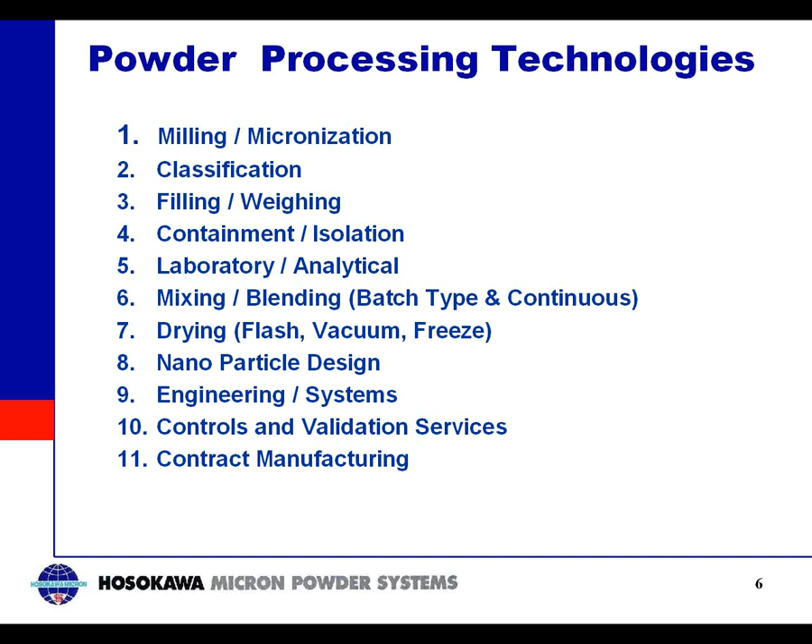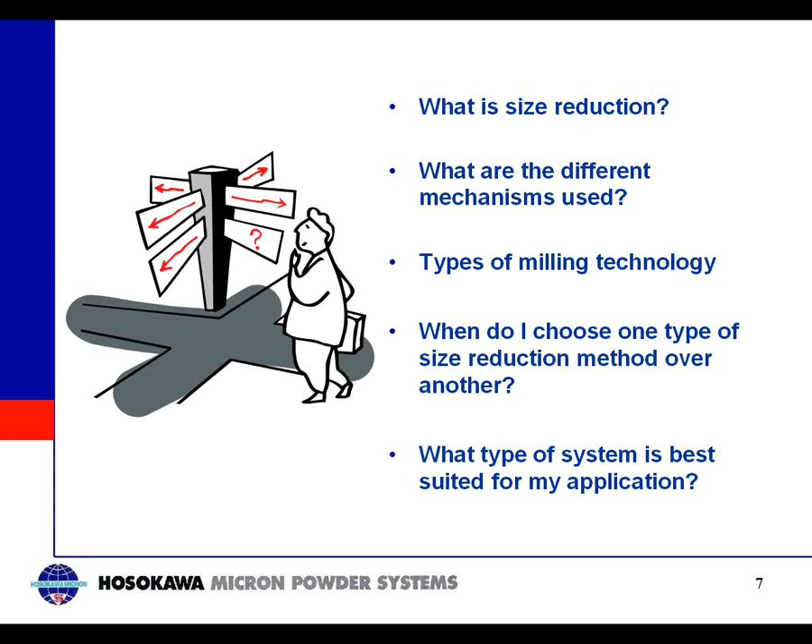Good afternoon. My name is Rob Voorhees, and I will be the presenter for today's webinar. Welcome to Part 2 of our presentation on basic size reduction. The overview today will cover fine and ultrafine grinding, general mill types, operating principles, application information, and basic system concepts and system components.

In Part 1, we discussed the 4 basic principles utilized in milling equipment for the purpose of dry particle size reduction: shearing or cutting, attrition, compression, and impact. In many cases, a combination of these principles may be employed in any one machine. The fine grinding machines we will discuss today employ primarily the principle of impact grinding.

The subjects covered today will be fine to ultrafine particle size reduction. Fine size reduction will be defined as particles ranging from approximately 50 microns in diameter down to 20 microns in diameter. Ultrafine size reduction will be defined as particles that range from 20 microns down to 1 micron or less.

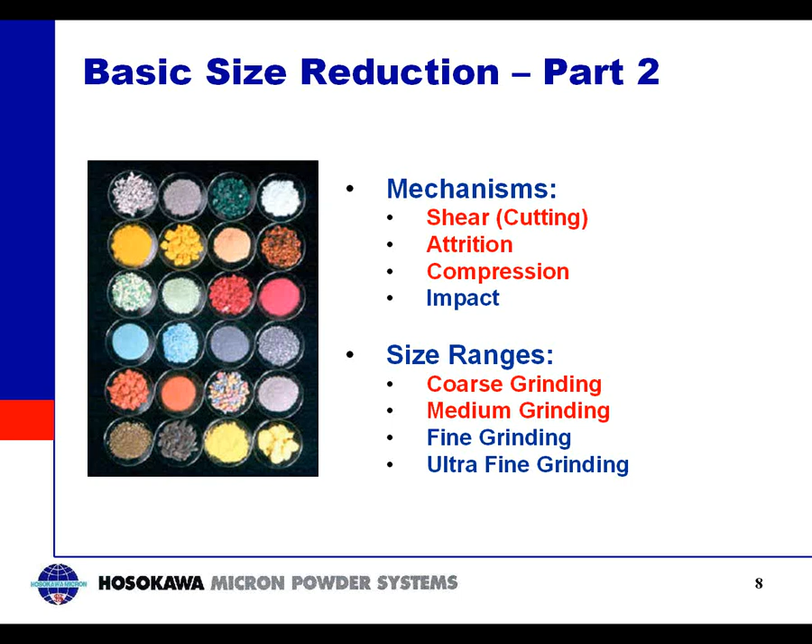Coarse grinding and medium grinding, noted in red, were the topic of our webinar last month. For those of you who were unable to participate, you can view this webinar and review grinding principles and particle size definitions by visiting our website and viewing our educational center.

Today we'll look at size reduction using the grinding principle of impact. Impact is defined as a solid object moving at high velocity coming in contact with a stationary particle. The impact principle is employed in all 3 of the machine types we will discuss today: air classifier mills, spiral jet mills, and fluidized bed jet mills. Impact is used to achieve the highest fineness possible in these types of machines. Most hard crystalline and amorphous particles react very well to impact for the purpose of size reduction.

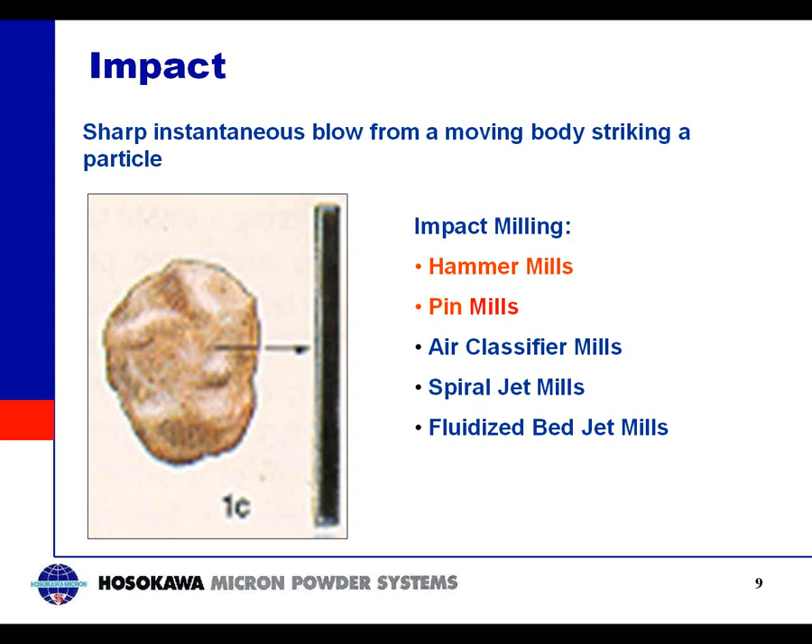The most important aspect of selecting a size reduction method is to know some basic information about the product you want to produce and the raw material it is made from. The 4 basic things you should know are: particle size of the feed material, the material's characteristics, the required end product particle size, and the required end product particle size distribution. Knowing this information will help you and the equipment manufacturer make the proper equipment selection.

It is important to note that based on product characteristics, only certain milling technologies can be employed for a given application. Starting a project understanding these basic requirements will result in an economical and trouble-free milling system solution for your powder processing application. It is also recommended to do test trials on a pilot scale piece of equipment. Almost all equipment manufacturers offer customers the capability to do in-house test trials. Important information on system design and scale-up are learned during these trials.

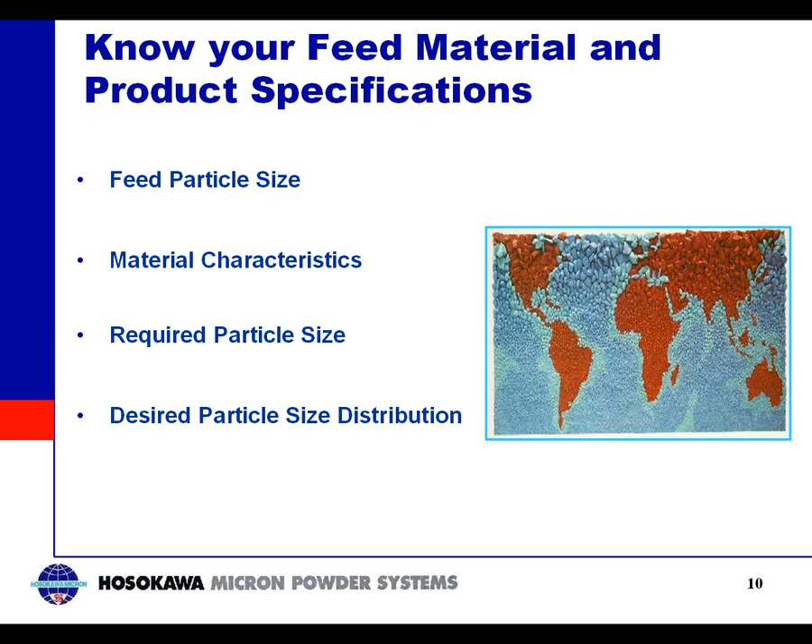In part 1 of basic size reduction, we talked about material characteristics and how they affect milling system performance. Let's review it again now.

Let's look at the effect of feed size on mill performance. Larger feed material means more residence time in the mill, and larger equipment will be required for a given production capacity. Feed size affects feeding methods and feeder selection. For example, air conveying large size, high bulk density feed to a mill may not be possible, and large feed material cannot be introduced to spiral jet mills using injector feed.

How does bulk density affect performance? Bulk density affects flowability of the product. Feeding can also be affected. Light density materials may flood past the feeder, affecting feeding accuracy. There are methods available to determine the flood and flow characteristics of materials. Bulk density will also affect the sizing of hoppers and finished packaging. Light bulk density material will affect grinding efficiency, as lighter materials are more difficult to keep in the grinding zone.

Cohesive products can cause numerous problems in a milling system as well. Cohesive and sticky products may build up on mill internals and can upset airflow and increase pressure drop across the mill. Systems may require the use of high-velocity air to keep mill internals clean.

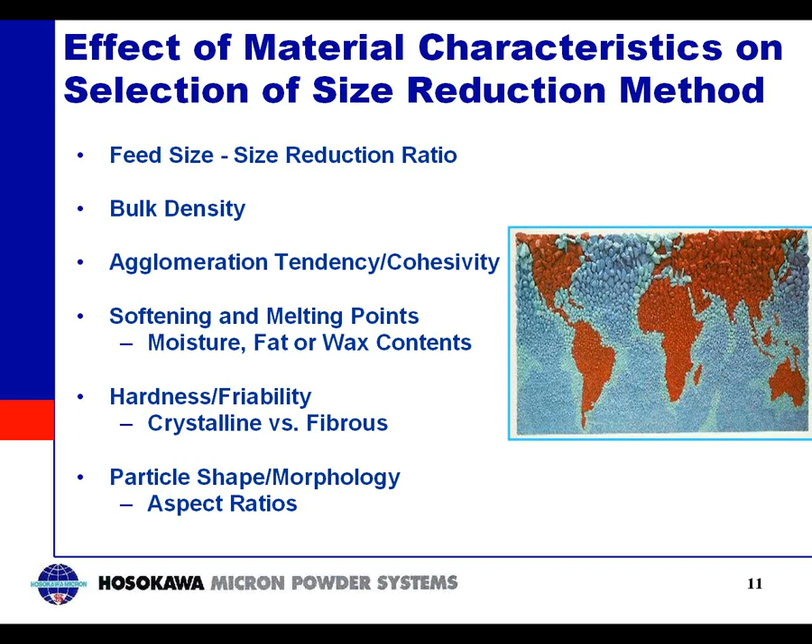Some of the mills we will discuss today can process very hard materials. All the mills we will discuss today can be wear protected, and certain types of jet mills can grind extremely hard materials that cannot be processed in other types of impact mills.

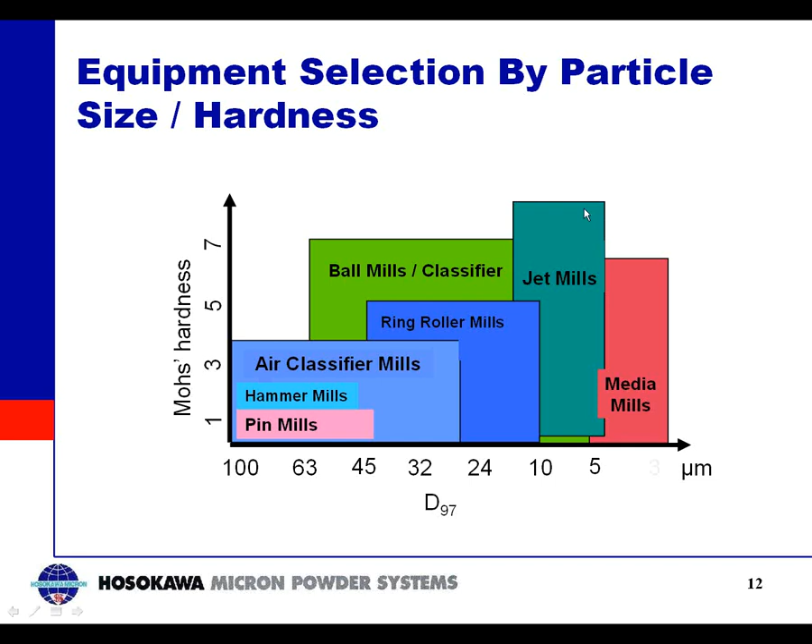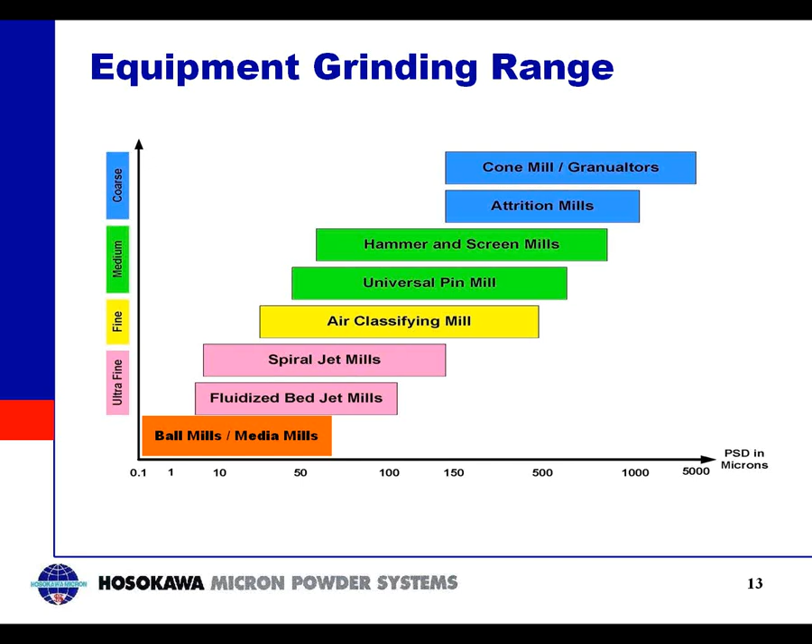The first mill type we will cover is the generic air classifier mill. Air classifying mills are probably the most widely used milling technology in the powder processing industry today for general size reduction of fine chemicals and food products. These types of mills are very versatile and allow operators to produce fine products with narrow size distributions.

Unlike mills discussed in Part 1 that basically use screens of various sizes to control particle size, in the air classifier mill, particle size is easily controlled by adjusting the speed of an internal classifier wheel. These mills incorporate impact grinding and air classification in a single process.

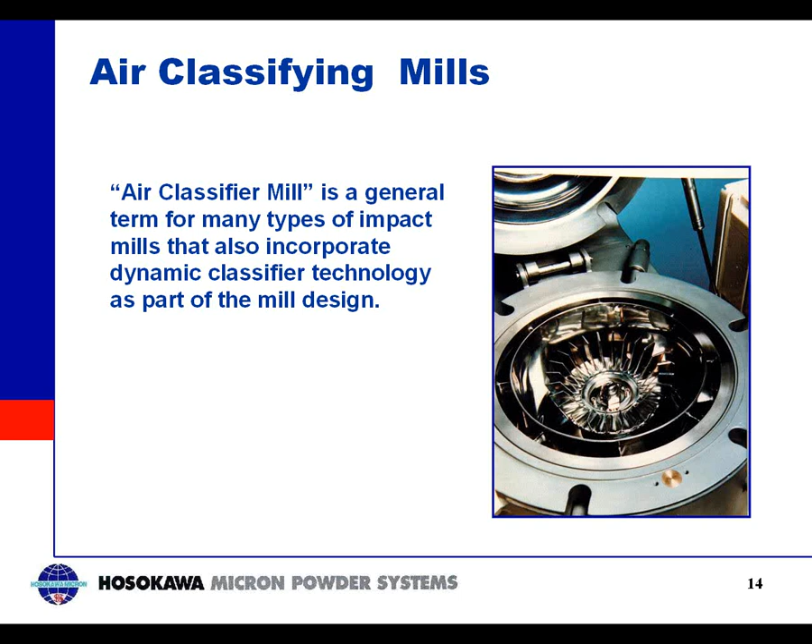The main principle of this mill type is to use air to convey material to the mill, classify the product into fine and coarse fractions, convey the fines out of the mill, and then return the coarse fraction to the grinding chamber for further size reduction. This process is repeated on a continuous basis.

The unique feature of this type of mill is that the classification step takes place inside the mill and is not a separate or external operation. This design allows these mills to be relatively compact and small in size. The main airflow is introduced from underneath the main rotor disc as shown here.

Material is introduced into the grinding chamber at the grinding zone and is impacted by the rotating hammers shown here. Processed material is then carried by the airstream to the classification zone shown here. Correctly sized material passes the classifier and exits the mill here. Oversized material is rejected by the classifier and is returned to the grinding zone.

The grinding and classification zones are normally separated by a shroud and baffle assembly shown here. The impact rotor and classifier have separate or independent drives so that the speeds of each component can be adjusted independently.

Some mill designs incorporate coaxial design drives as shown here. This design is a drive shaft within a drive shaft and provides a mill design that is very compact with a low overall machine height.

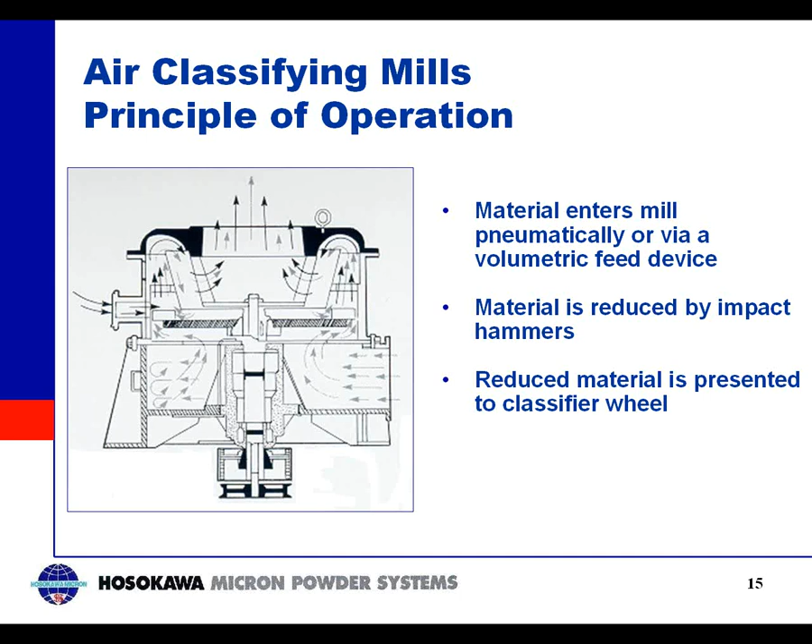Air classifier mills can be used for a wide variety of applications. Due to the requirement of a large volume of air, heat-sensitive materials can easily be processed.

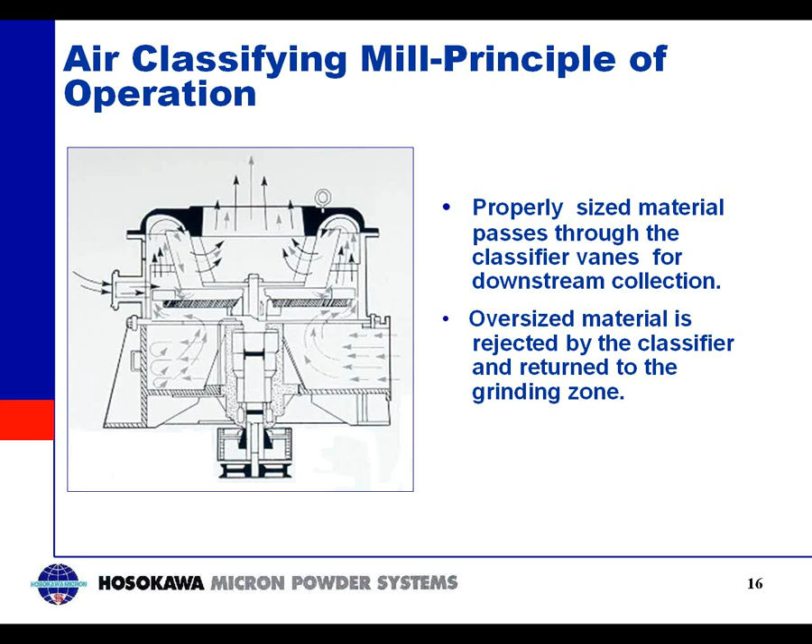The makeup air to the mill can also be conditioned so that humidity and temperature can be controlled when processing hygroscopic or heat-sensitive materials. Heat can also be added to provide drying when lower levels of moisture need to be removed from the product.

A wide variety of designs and sizes are available. Small units as low as 1 horsepower are capable of handling a few kilograms of material and are available for pilot scale and research and development use.

Sanitary designs are available for handling pharmaceutical and food grade products and when special cleaning and sanitary requirements need to be addressed. Large capacity mills of 600 horsepower and more are designed with special wear protected internal components. These mills are available for minerals-related applications or for materials that are somewhat abrasive in nature.

For handling materials that present an explosion potential, these mills can be designed to handle an overpressure of 150 psi.

To minimize the potential for unexpected drive failures, the bearing housings of these mills can be supplied with both vibration and bearing temperature sensors. These devices will allow the operator to know when problems become present before a failure actually takes place.

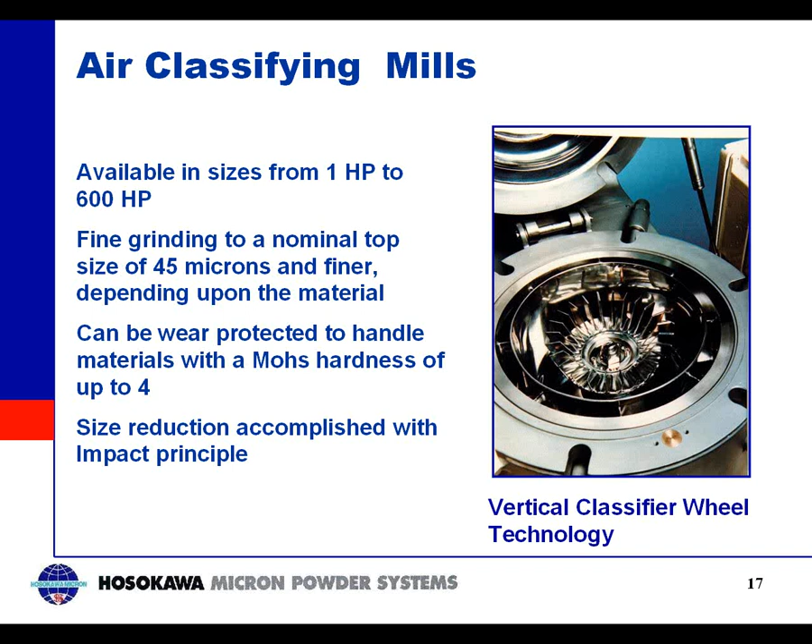Let's look at some other designs that function the same but are designed differently.

Another type of air classifier mill is one with a horizontal classifier wheel. While in principle it functions the same as the vertical wheel mill, due to the wheel orientation, the shroud and baffle assembly is not possibly used to separate the grinding zone from the classification zone.

So to provide a separation between these two zones, the housing is extended to allow room for the product to circulate within the mill. This mill type is usually much taller in height and cannot be provided with a coaxial drive assembly.

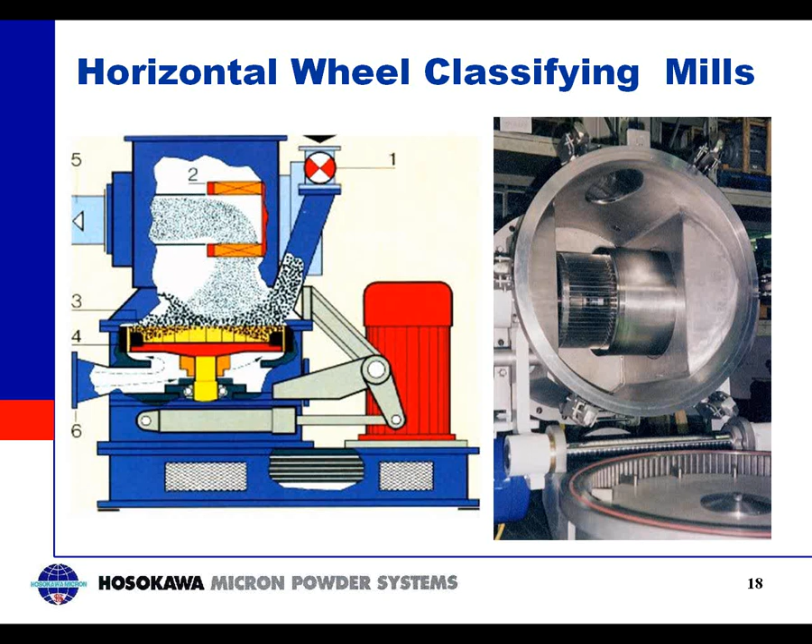Another type of air classifying mill is one that has both the main rotor and the classifier mounted on one shaft rotating at the same speed.

While this type of mill offers a reduction in size, cost, and installed horsepower, there is also a loss of flexibility in adjusting the final product specification.

This type of mill may be a good option when only one specific product is produced and no changes in end product fineness are required.

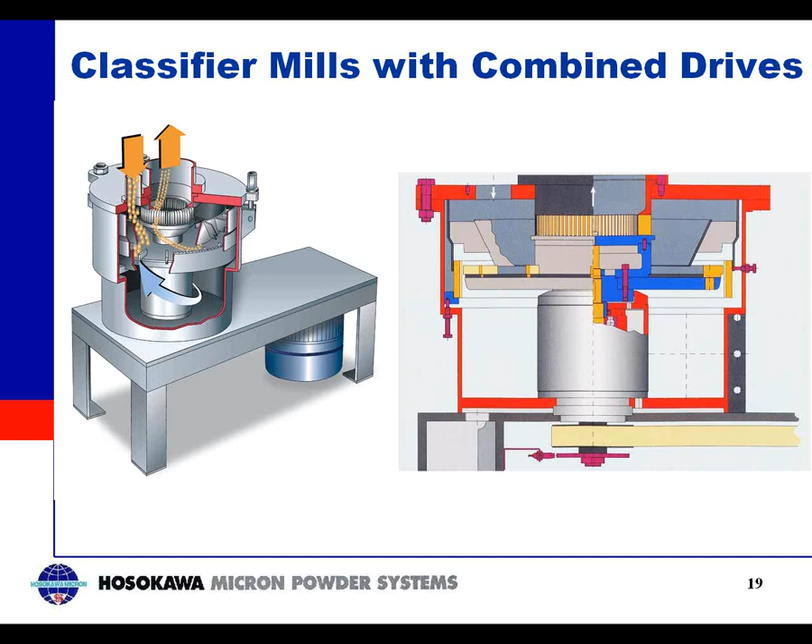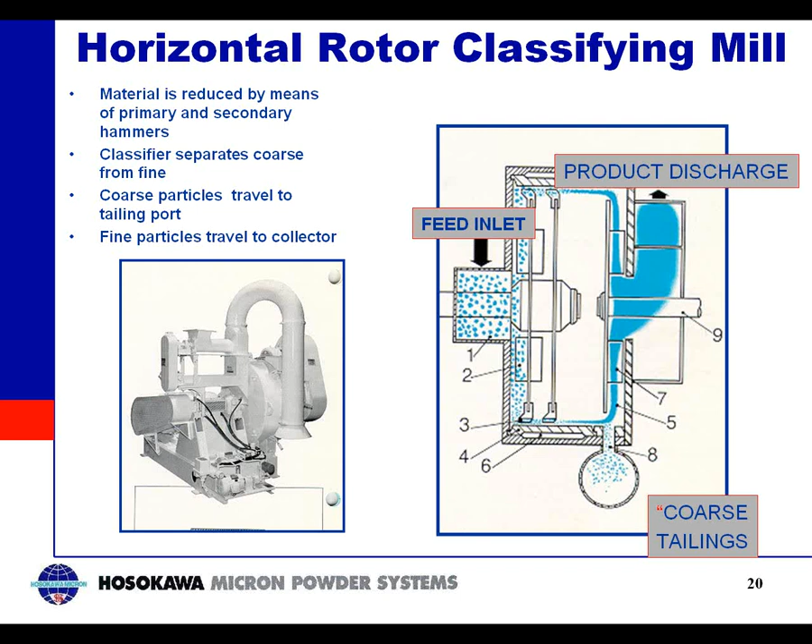Let's talk about the operation of the air classifier mill and the important operating parameters. While the classifier speed has a large effect on particle size, airflow can also be adjusted to change particle size. While the primary purpose of the classifier is to control particle top size, the mill internal components can also be changed to adjust particle size distribution.

As an example, the standard liner configuration supplied with these mill types is a multiple deflector liner. This liner type has vertical grooves designed into the circumference of the liner. If you recall from our discussion on our last webinar on hammer mills, this type of liner serves the purpose of slowing the circumferential speed of the particles and deflecting them back into the path of the rotating hammer, maximizing the impact force of the particle.

The liner type can also be changed to reduce the generation of fines or to make an overall coarser size distribution. The use of smooth liners in the grinding chamber will decrease the impact force of the hammer that is applied to the particle. The impact hammer design will also affect the impact force and thus affect end product size. An alternate type of impact hammer shown here is the pin. Use of a pin rotor reduces the impact force, providing a coarser grind, and minimizes the generation of fines. Rotor speed can also be reduced to minimize generation of fines.

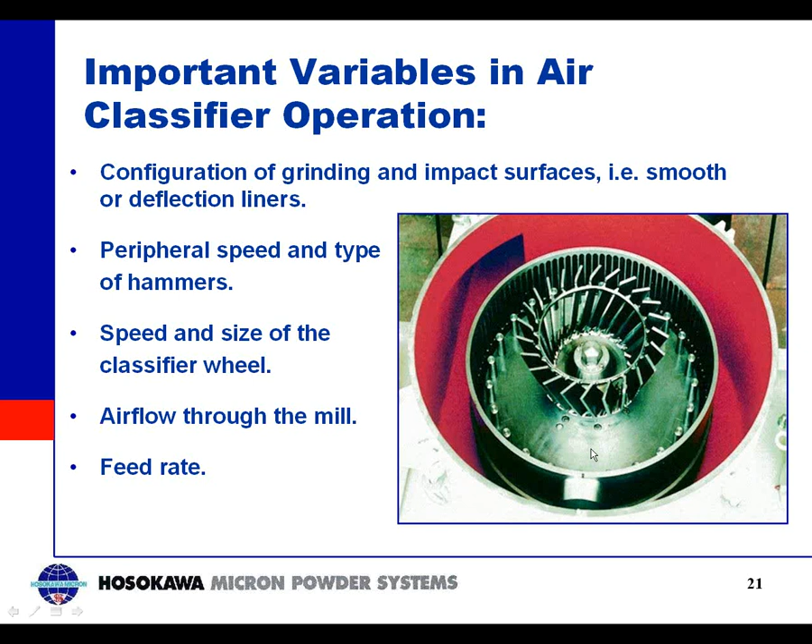There is a drag force or centripetal force generated by the airflow traveling toward the wheel. There is also a mass force or centrifugal force generated by the rotating classifier wheel on the particle. When these two forces are balanced for a specific particle mass, the particle will have a 50-50 chance of either being accepted or rejected by the classifier. So by varying these forces, a specific particle size or cut point can be attained.

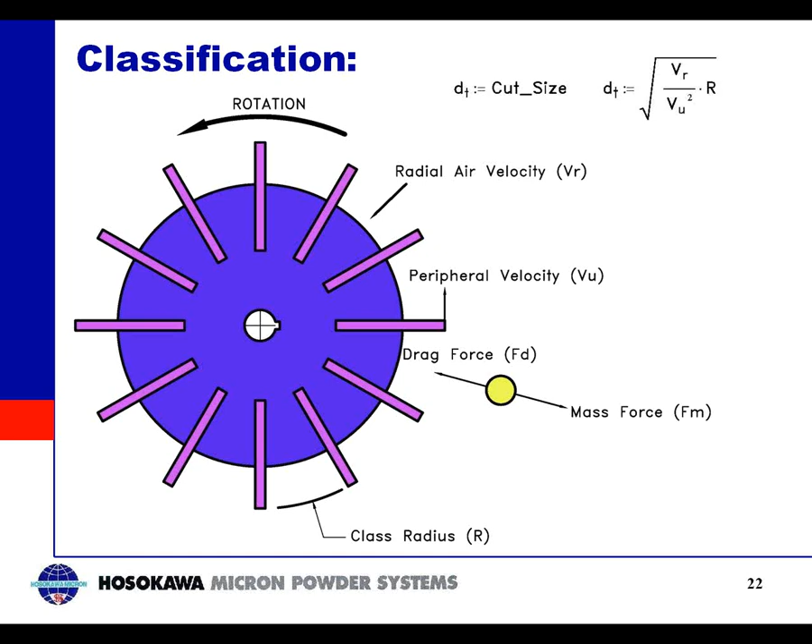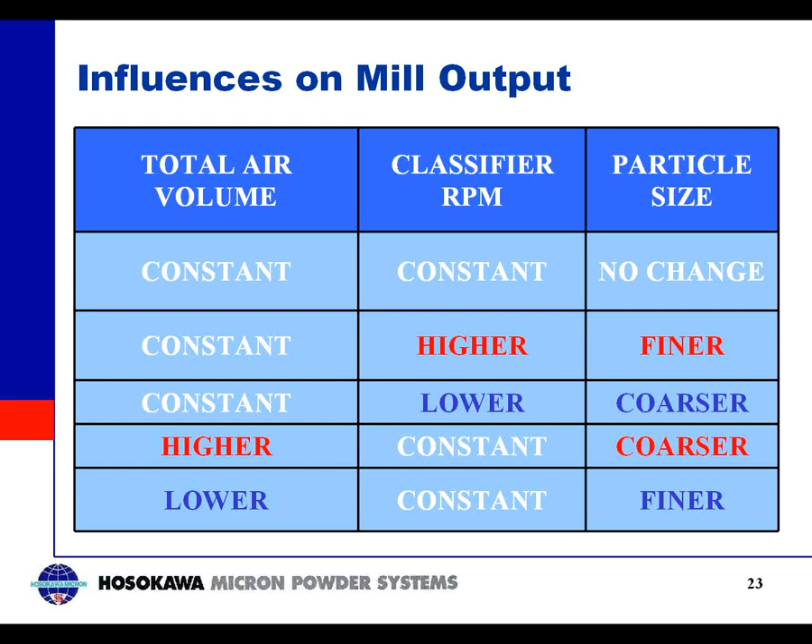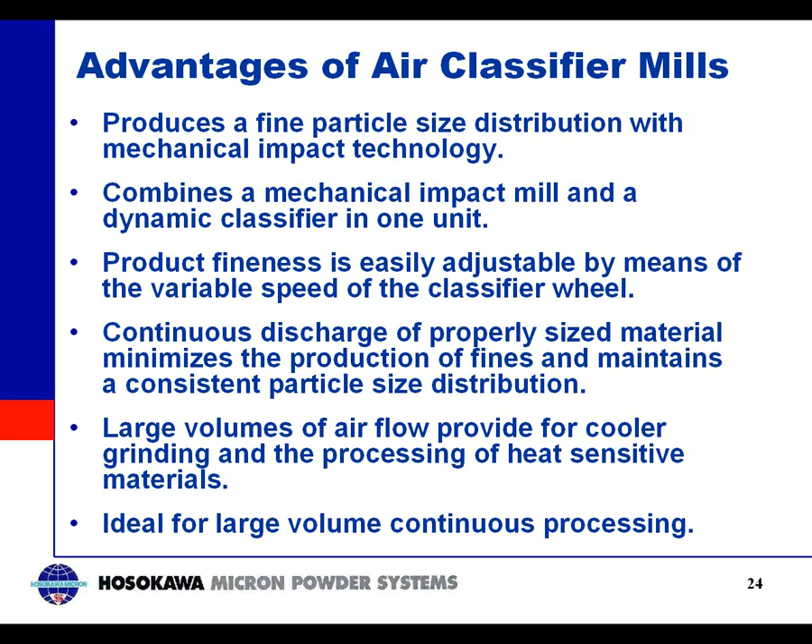Air classifier mills offer many benefits, including exact particle size control, flexibility to easily change particle size, compact system design, economical operation, consistent product quality, and a large production capacity.

As an example, if you wanted to process talc to 45 microns at 4.5 tons per hour, you would divide 9,000 pounds per hour by 45 pounds per horsepower per hour to arrive at the required production machine horsepower of 200 horsepower.

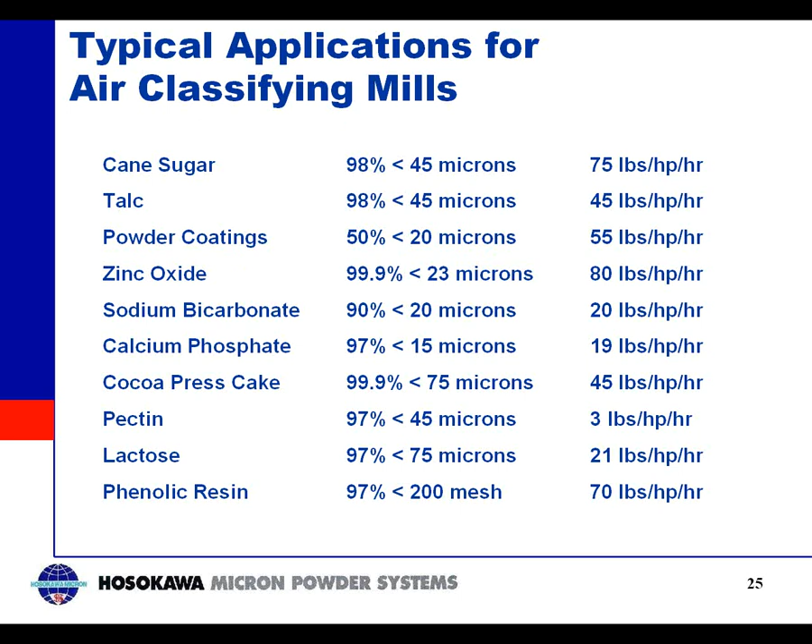In some cases, safety filters, as shown here, are also included in the system. These filters prevent material leakage from the product collector from affecting fan and heat exchanger performance. It is almost always desirable to maintain a constant airflow to ensure product quality and reproducibility.

The classifier is the primary device used to adjust particle size. In all cases, the main drive amperage of the mill is used to control the feed rate to the mill. For maximum production, these mill systems are very often run at 95 to 100% of the full load amperage of the main drive motor of the mill.

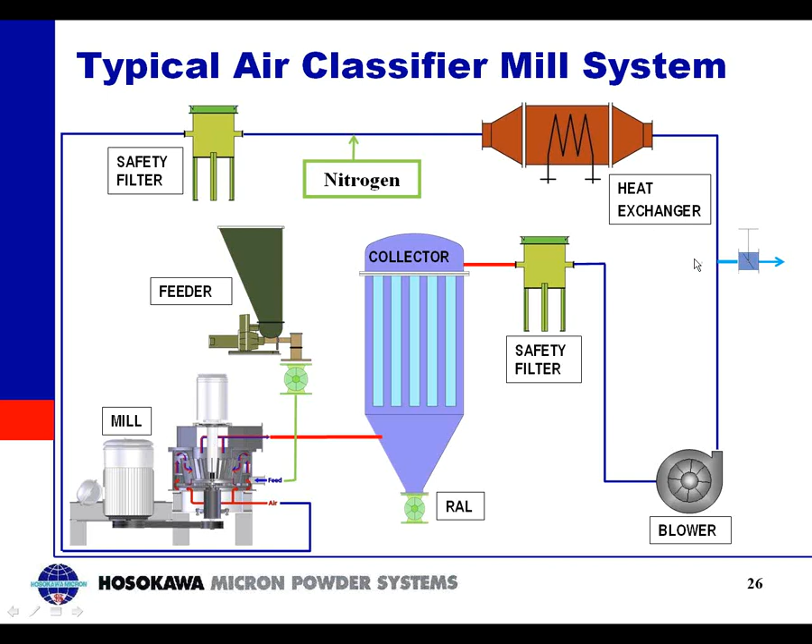When operating with conditioned air or nitrogen, energy savings becomes a major consideration. In these cases, closed-loop systems can be supplied to maximize energy savings, as the recycled gas can be reused, reducing nitrogen consumption, or for the reclaiming of heated or cooled gas. The closed-loop system incorporates the additional elements of a heat exchanger and additional controls and valving to bleed off excess gas and control system pressure.

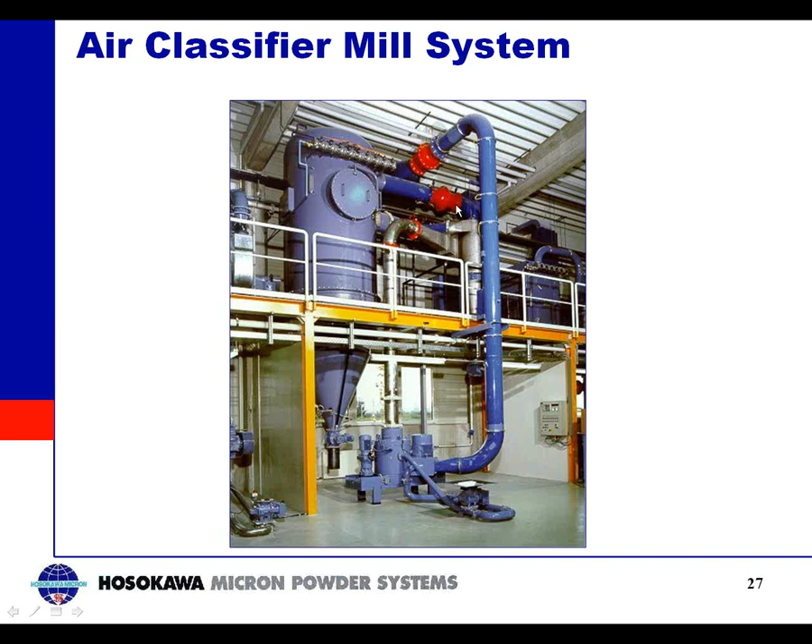This last picture shows an actual air classifier mill installation. This is a 40 horsepower mill with a floor-side pneumatic feeding setup. The system is designed for overpressure containment in the event of an explosion and has explosion barrier valves incorporated into the design, as shown here in red, to contain the overpressure within the system, protecting the local environment and the personnel in it. The product collector is shown mounted on a mezzanine with the finished product discharge at the ground floor level.

Let's move on to ultrafine grinding. The presentation today will cover spiral jet mills, sometimes also referred to as pancake jet mills, and lastly, fluidized bed jet mills. These mill types are often used for producing very fine grinds.

Remember earlier we defined ultrafine grinding as end product fineness ranging from 20 microns down to 1 micron and below. There are also other types of jet mills, such as loop type mills and target type jet mills, but we will not discuss them today.

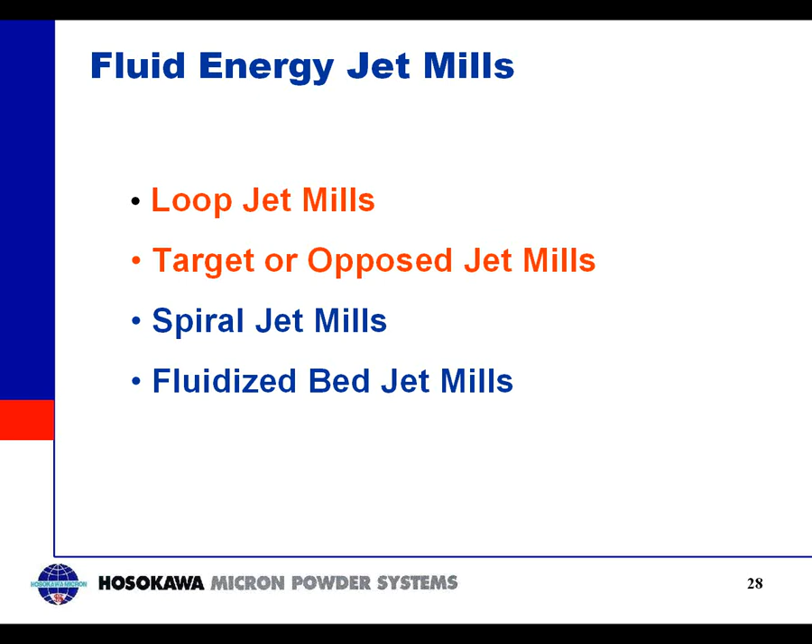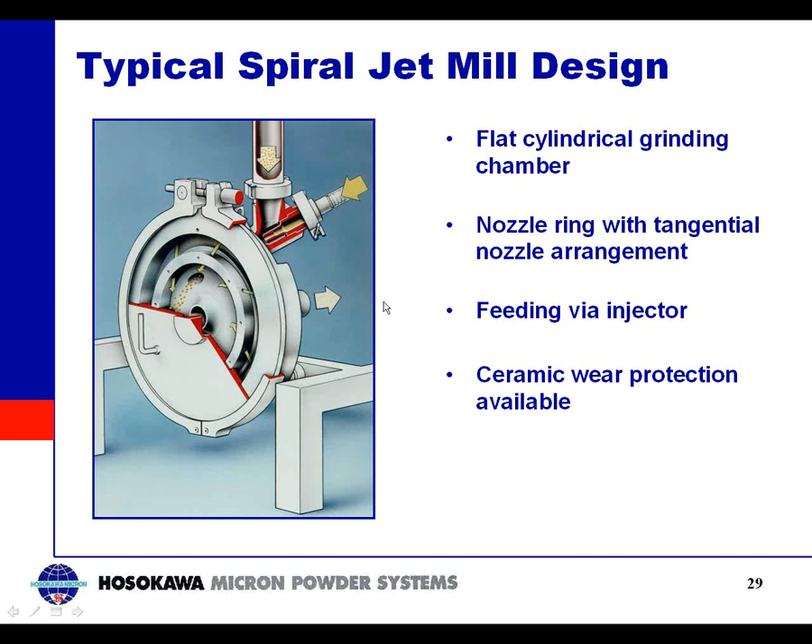This is a cross-sectional view of a spiral jet mill. The basic design is simple and incorporates no moving parts. Compressed gas is used to effect both size reduction and to introduce feed into the mill. A series of nozzles located around the perimeter of the grinding chamber allows the introduction of grinding air. The orifice at the center of the grinding chamber provides an outlet for the finished product.

These mills do not have an internal classifier in their design. In a spiral jet mill, particles are reduced in size by interparticle collisions and impact against the grinding chamber wall. Coarse particles are subject to centrifugal forces and stay in the grinding chamber longer for further size reduction. Fine particles are subject to the drag force of the airflow and are drawn to the center of the grinding chamber and exit the mill through the outlet orifice.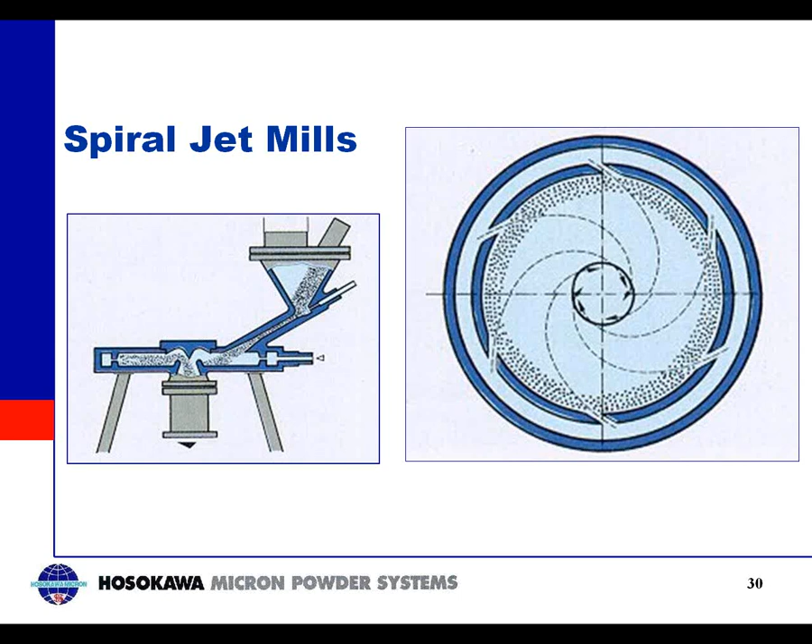Spiral jet mills are very often utilized in the pharmaceutical industry for their capability to produce very fine particle size distributions. Their simple design makes them much more suitable for cleaning and validation requirements.

Shown here is a 12-inch diameter spiral jet mill designed with the materials of construction and finishes required of the pharmaceutical industry. This mill skid incorporates the feeder and controls on one portable skid. The product collector in this case is a separate unit.

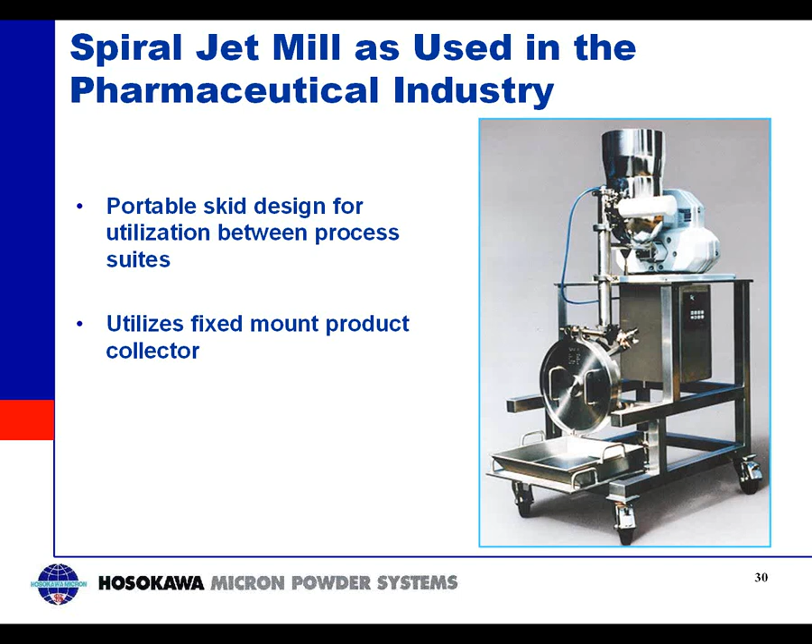Jet mills like this one are available for small-scale processing. They are designed to handle very small volumes of material, down to less than 5 grams, and can achieve very high yields due to small internal surface area of the mill and local product collection. These small mills are easily incorporated into glove boxes and isolators when the need arises to handle toxic compounds. The complete system, including feeder, can be driven by compressed gas, eliminating any problems meeting Class 1 electrical requirements.

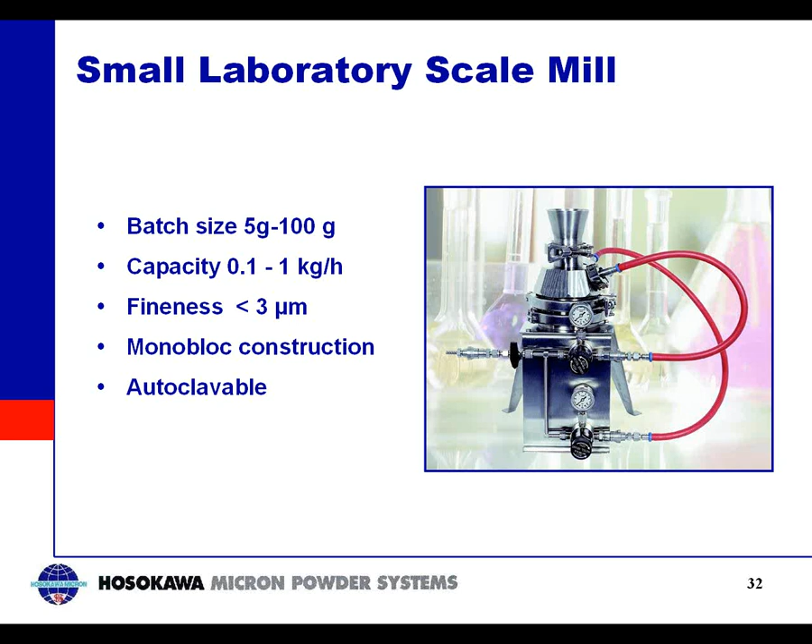Another relatively new development is the disposable jet mill. The main body and material contact components of this mill are made from PVDF, a corrosion-resistant polymer. Small quantities of potent compounds that require a minimal amount of exposure, or that are difficult to clean, can be processed in this type of mill. Upon completion of the milling campaign, the low-cost main components of the mill can be disposed of, eliminating the need for cleaning and validation.

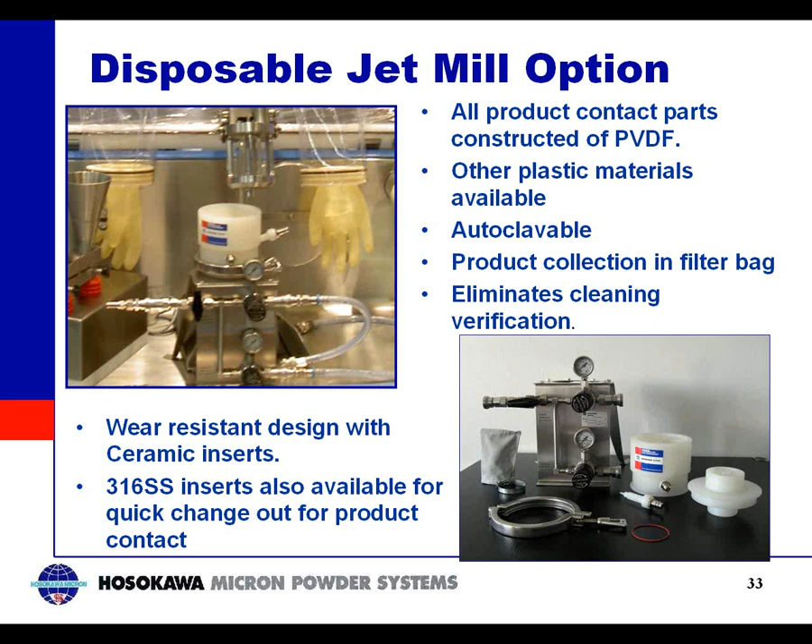Now let's discuss the operational parameters of this type of jet mill. The cut point on a spiral jet mill is a function of the total air volume and the ratio of grinding air to injector air. The following fundamental relationships will help you understand the effects of these parameters on the performance of the mill.

A high grinding air pressure produces a finer end product, but also a higher amount of oversize in the fines. A low injector air pressure produces a lower suction at the feed intake and negatively affects the feed intake to the mill. A high injector pressure will result in a coarser grind due to the shorter residence time of the material in the mill because of the higher overall total air volume.

Feed rate will also affect particle size. A higher feed rate will result in a coarser product. In order to achieve the desired end product at the maximum throughput, both airflows must be optimized. To prevent product blowback at the feed, the injector air pressure must always be equal to or higher than the grinding air pressure. To maintain a consistent end product, the feed rate and grinding air pressure must be kept constant.

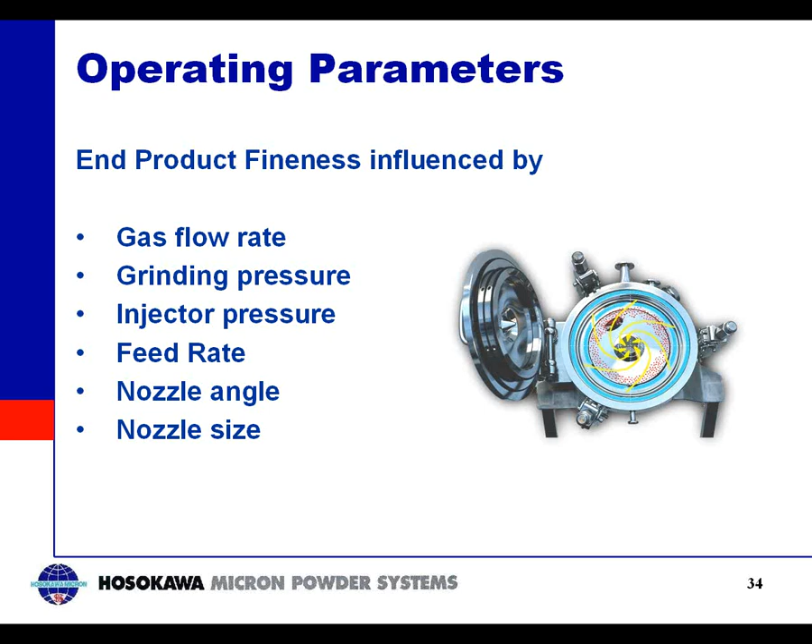Altering the end product fineness can also be accomplished by changing other parameters. The angle of incidence is defined as the nozzle angle as measured from the radius of the grinding chamber. A steep angle of incidence of 30 degrees will result in a shorter material residence time in the mill and a resultant coarser end product. A wider angle of incidence of 50 degrees will result in a longer material residence time in the mill and a resultant finer end product.

Nozzle diameters also affect end product fineness. All other operating parameters being held constant, larger diameter nozzles will result in lower grinding air velocity and a coarser end product. Smaller diameter nozzles will result in a higher grinding air velocity and a finer end product.

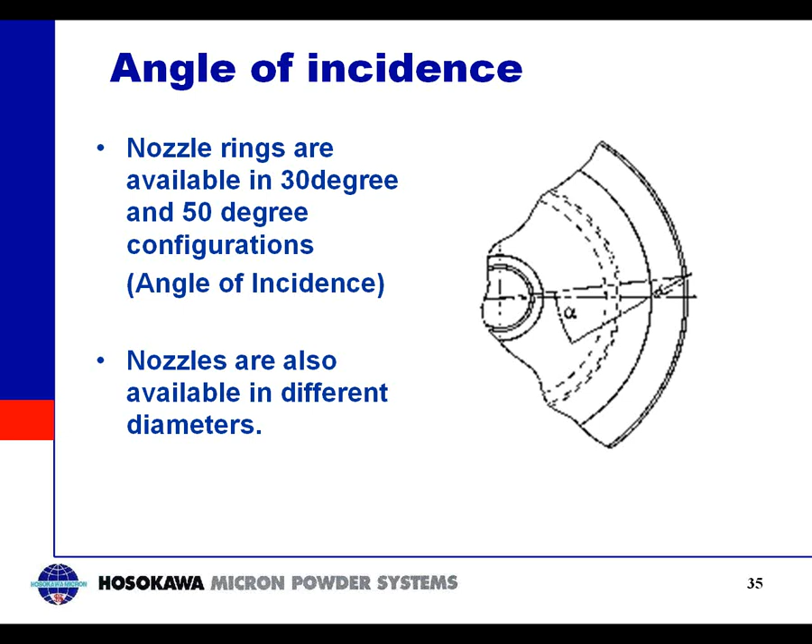The number of nozzles can be changed with different effect. All other operating parameters being held constant, a greater number of nozzles will result in a lower grinding air velocity and coarser product. A lesser number of nozzles results in a higher grinding air velocity and a resultant finer end product.

This chart graphically depicts the results that the changes of process and component parameters have on end product fineness. This chart will help you better understand the basic operating variables of a spiral jet mill and how they affect end product fineness.

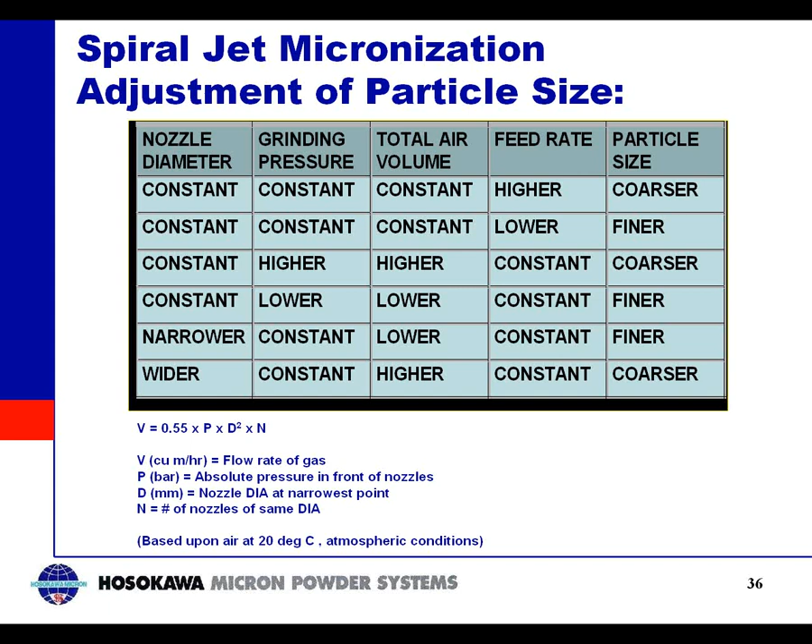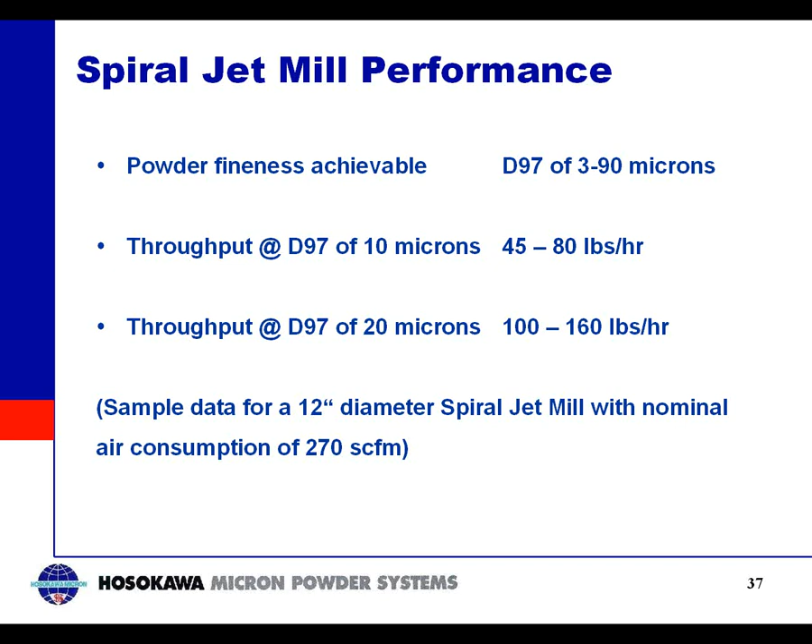Here are some of the benefits and limitations of these mill types that you should consider when deciding whether to choose this technology for your application. They are both simple in design and simple to operate. No moving parts means reliable operation, and they are very easy to disassemble, inspect, and clean.

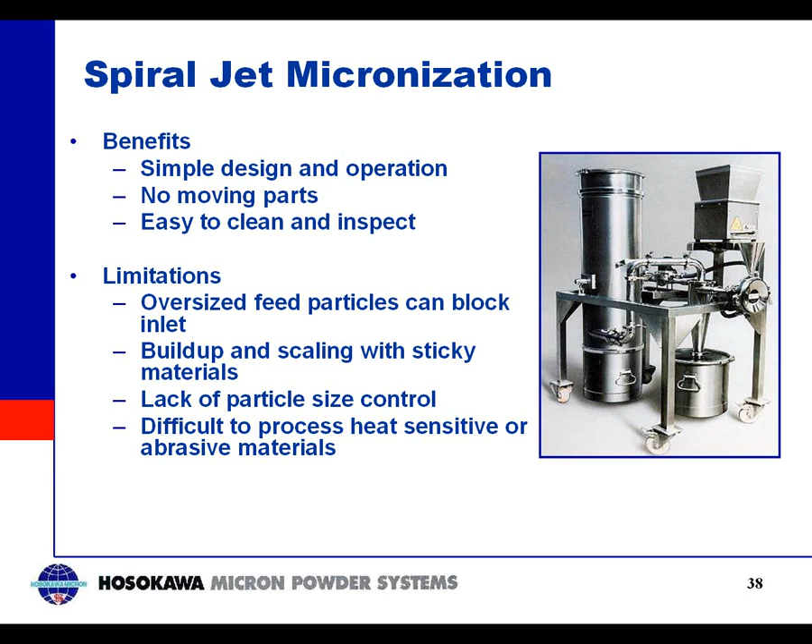Their limitations include the lack of good internal particle classification, which very often leads to oversized particles, and the requirement to overgrind or regrind to achieve the final desired particle size distribution. Buildup can occur when processing sticky materials, affecting the final particle size distribution and processing time. Heat-sensitive and abrasive materials are sometimes difficult to process in spiral jet mills.

This chart gives you a summary of the basic capabilities of these jet mills. Most of these topics we have already covered in the presentation, but I'll review them again here.

Particle size distribution is wide because of the lack of classification. Energy consumption is higher due to the requirement for overgrinding. This type of jet mill is not well suited for processing sticky and heat-sensitive materials.

The noise level is high due to the high velocity compressed gas. Feed size is limited by the nozzle size of the injector feed. This type of jet mill is not well suited to process abrasive materials.

Cleanability is very good, as there are few components and disassembly is easy. And lastly, high pressure designs are available for specific applications.

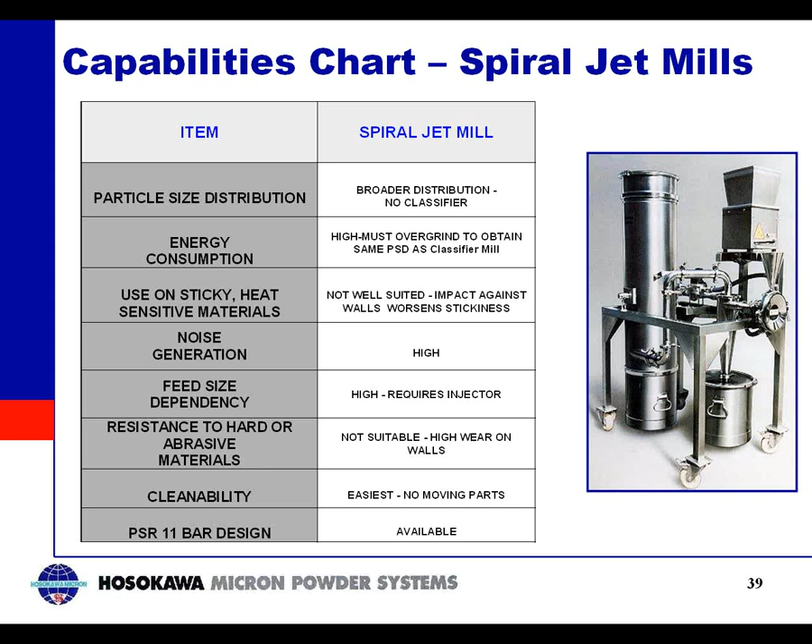Let's move on to talk about fluidized bed jet mills. The fluidized bed jet mill design and functionality is quite different from the spiral jet mill. Size reduction actually takes place within the bed of material, where particle-to-particle collision results in the reduction of particle size.

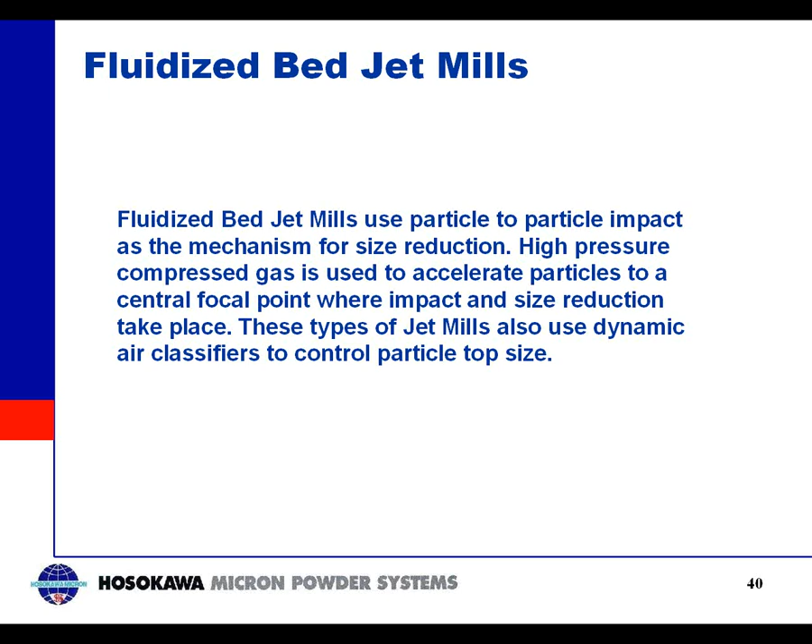Fluidized bed jet mill designs incorporate a grinding zone as shown here at the bottom of the mill chamber. The classification zone is located at the top section of the mill. Feed material can be introduced to the mill either through a top gravity feed inlet as shown here or directly into the fluidized bed at the bottom of the mill.

These mills work by accelerating a gas through a nozzle directed to a central focal point. Multiple nozzles are used to generate a grinding zone at the center of the mill. The material bed height in these mills will completely cover the nozzles during operation. Only gas and not product is fired through the nozzles.

The high velocity gas entrains the material in the bed, and the combined gas-material mixture is directed to the central grinding zone. Particle-to-particle collision is responsible for size reduction. Fine material is carried by the upward flow of air to the classifier wheel, where material ground fine enough exits the mill, and oversized material is returned to the grinding chamber.

Please refer back to our discussion on the theory of classification for air classifier mills. The concept and formula for cut point determination with a dynamic classifier wheel are the same.

Most applications utilize top gravity feed. However, applications where very light density materials are reprocessed can utilize a bottom feed. This ensures that product gets into the fluidized bed and does not float at the area around the classifier, reducing both mill capacity and efficiency.

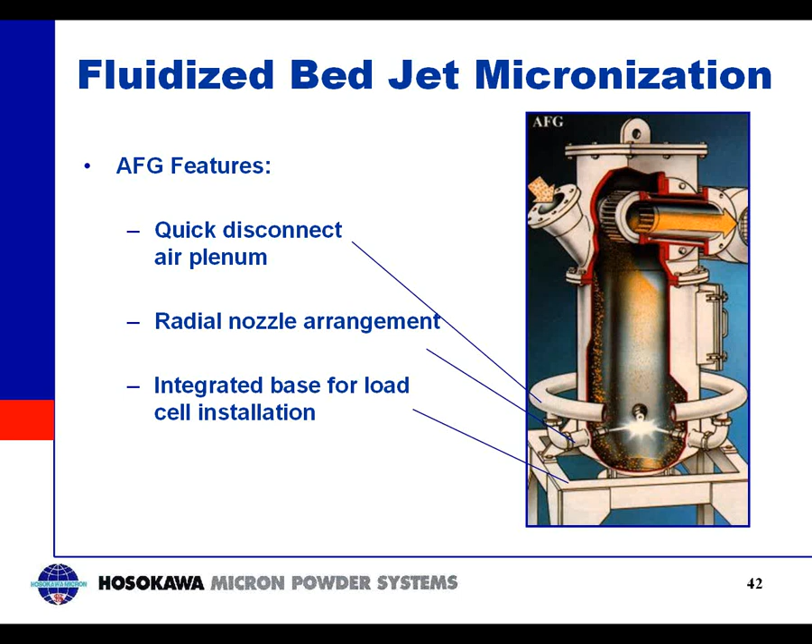Mill designs, materials of construction, and finishes are available for all applications. Designs are available for handling materials that are potential explosion hazards.

Due to the high volumes of gas utilized in processing, in most cases it is not economical to process materials using inert gas. For those materials that are potential explosion hazards, the mills can be designed for high overpressure, effectively containing any explosion that may occur.

For the processing of extremely abrasive materials, these mills can be lined with ceramics or polyurethane. New technology allows for the high wear components, particularly the classifier, to be made in silicon carbide or cast aluminum oxide, providing thousands of hours of service life when processing abrasive materials.

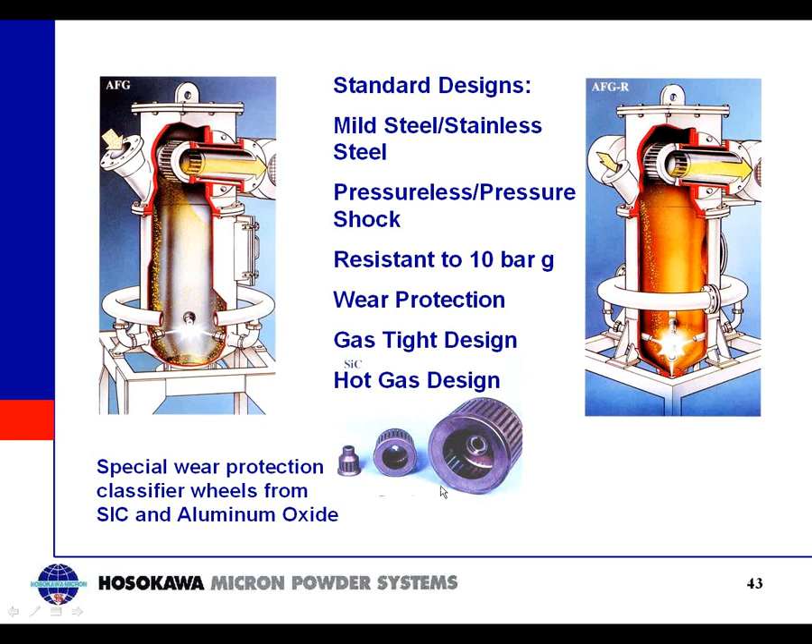The function of nozzle size and grinding pressure has the same end result as we already saw with the spiral jet mill. The difference with this type of jet mill is the addition of the internal classifier.

This chart graphically depicts the results that the changes of process and component parameters have on the end product fineness. This chart will help you to better understand the basic operating variables of a fluidized bed jet mill and how they affect end product fineness.

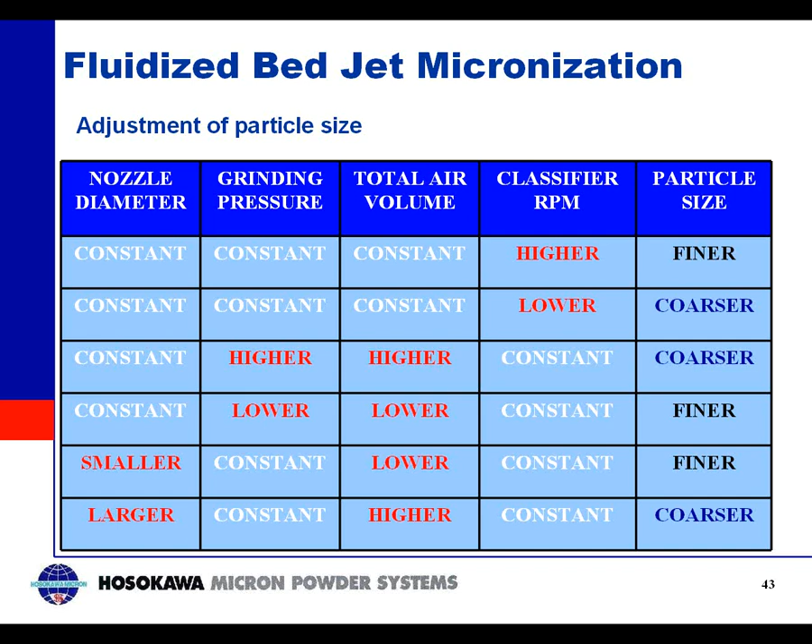Here are some of the benefits and limitations of these mill types that you should consider when deciding whether to choose this technology for your application.

These mills produce the finest particle size with the steepest particle size distribution. Materials that require minimum ferrous contamination, that are heat sensitive, or that are highly abrasive can be easily processed in the fluidized bed jet mill.

Operating costs are minimized as energy consumption is reduced as correctly sized particles exit the mill immediately. Unlike spiral jet mills, using a large feed size is possible due to the large feed inlet.

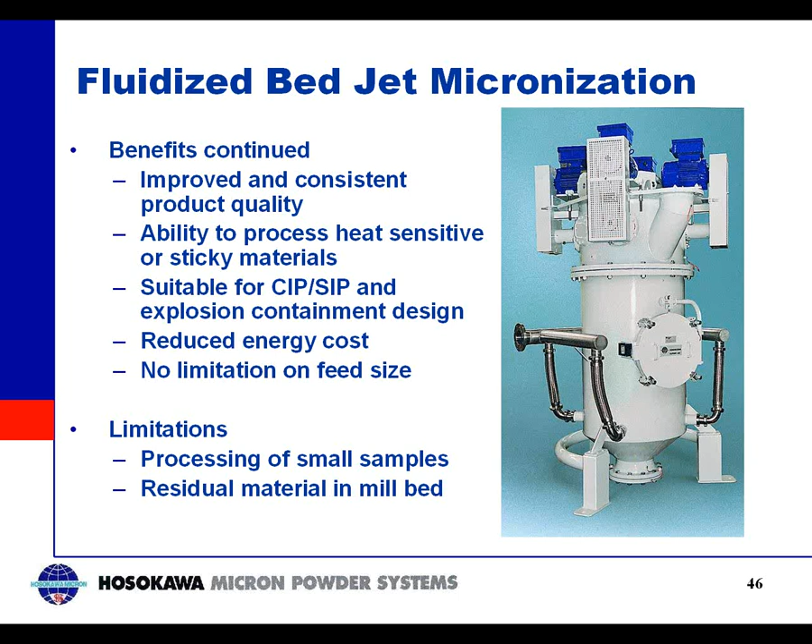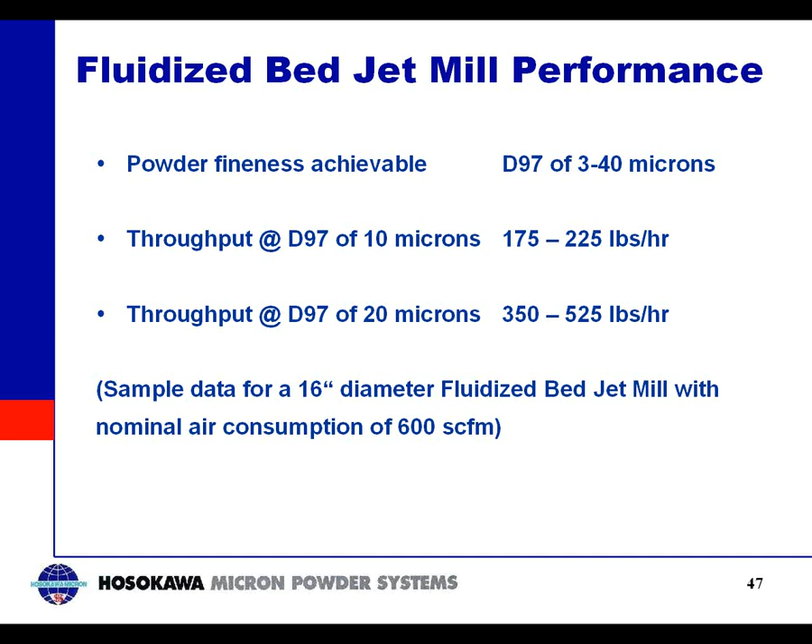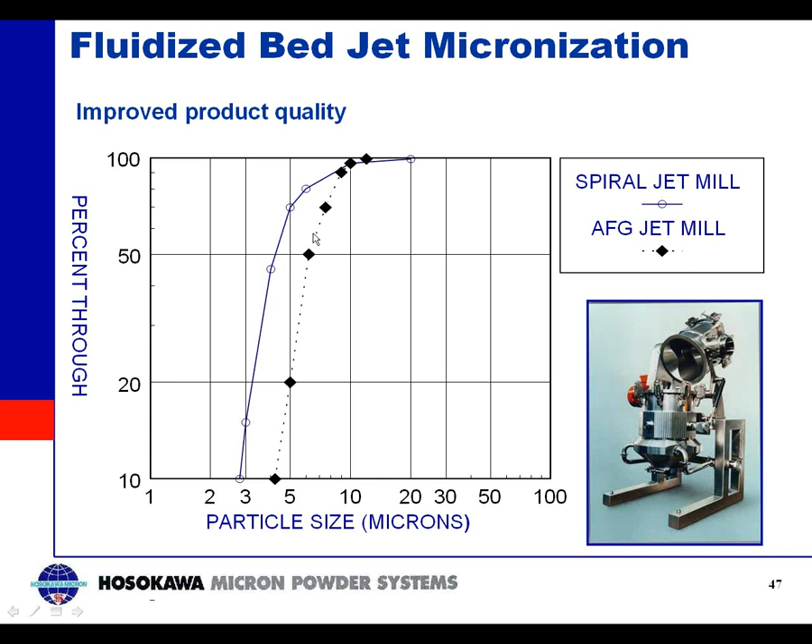The fluidized bed jet mill, as shown here, is capable of producing a much steeper particle size distribution with lower overall energy consumption.

Fluidized bed jet mills can handle a much wider application range than spiral jet mills. Due to their operating principle, they can handle extremely abrasive materials as particles are impacted against each other and not against the internal components of the mill.

Very heat-sensitive materials can be processed due to the rapid cooling of the grinding air as it expands in the grinding chamber. Soft and sticky material can be processed as buildup is eliminated due to particle-to-particle impact, not particle-to-grinding-chamber impact. Materials requiring a high degree of brightness or purity can be processed in these mills as most contact with ferrous components is eliminated, or ceramic components can be used to minimize ferrous contamination almost altogether.

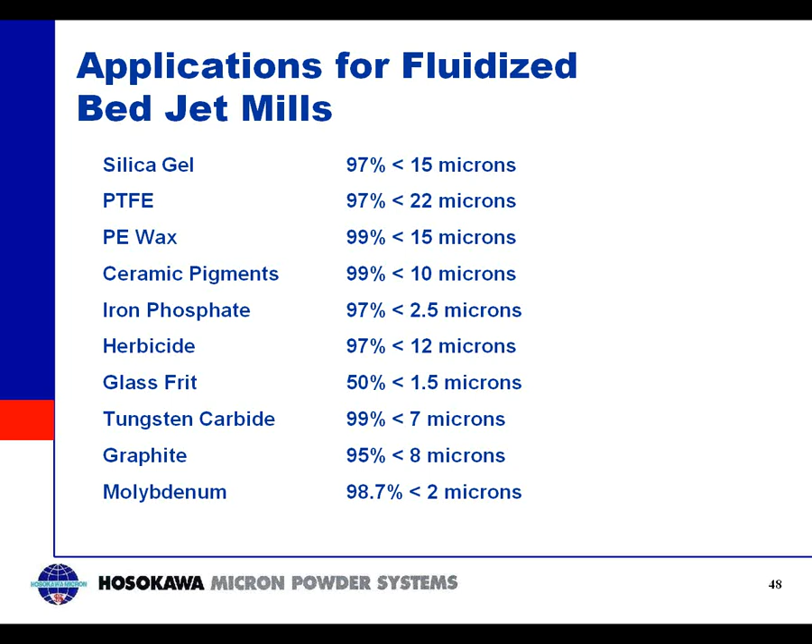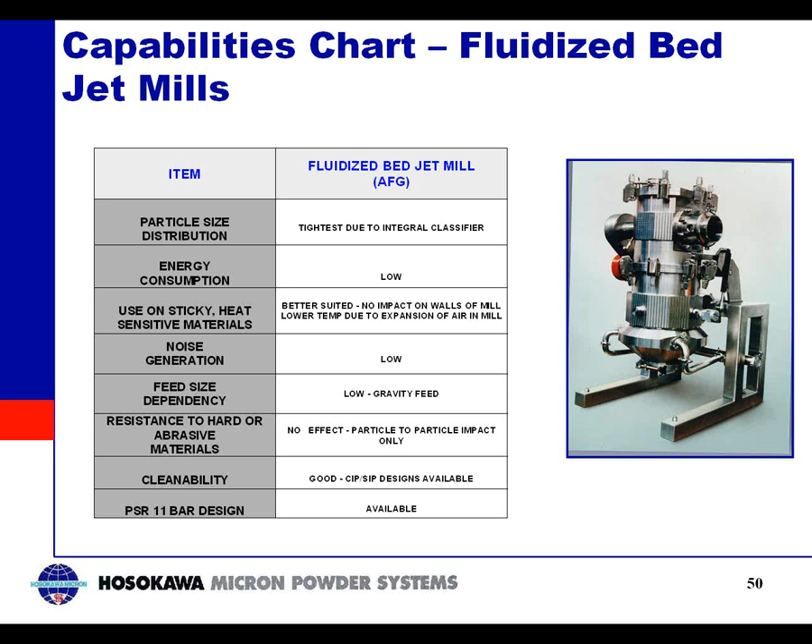A wide range of feed size is possible. This type of jet mill also is particularly well suited for handling abrasive materials. And cleanability is good as clean-in-place system designs are available. Lastly, high-pressure mill designs are available for handling materials that present potential explosion hazards.

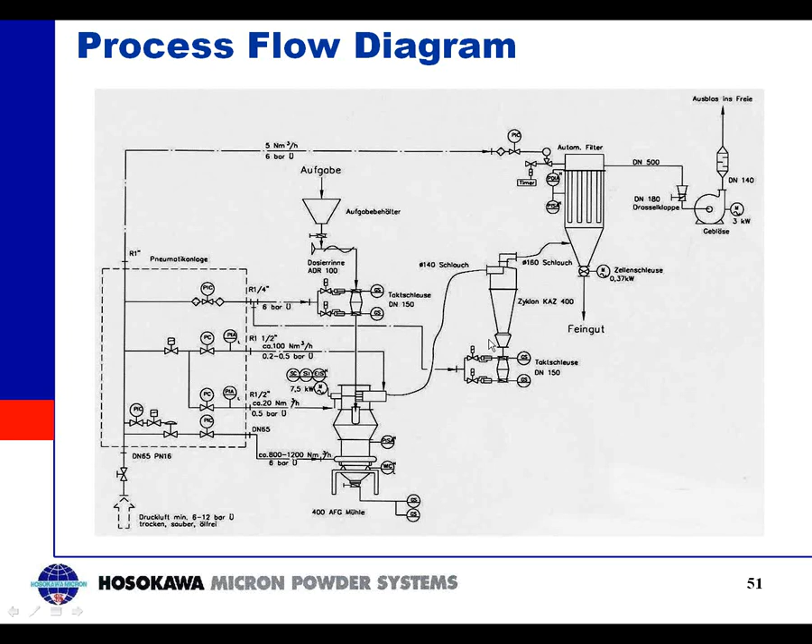In the design of the fluidized bed jet mill system, the mill typically will operate at either zero or a slightly negative pressure in the grinding chamber. The system fan is sized to maintain this pressure, and a pressure transmitter located in the grinding chamber senses the chamber pressure and provides feedback to the system fan in order to maintain a constant mill pressure and airflow.

This manifold contains pressure regulators for the grind air, bearing purge air, classifier gap purge, and other system requirements, such as air required for operating valves and for the product collector reverse pulse jet air.

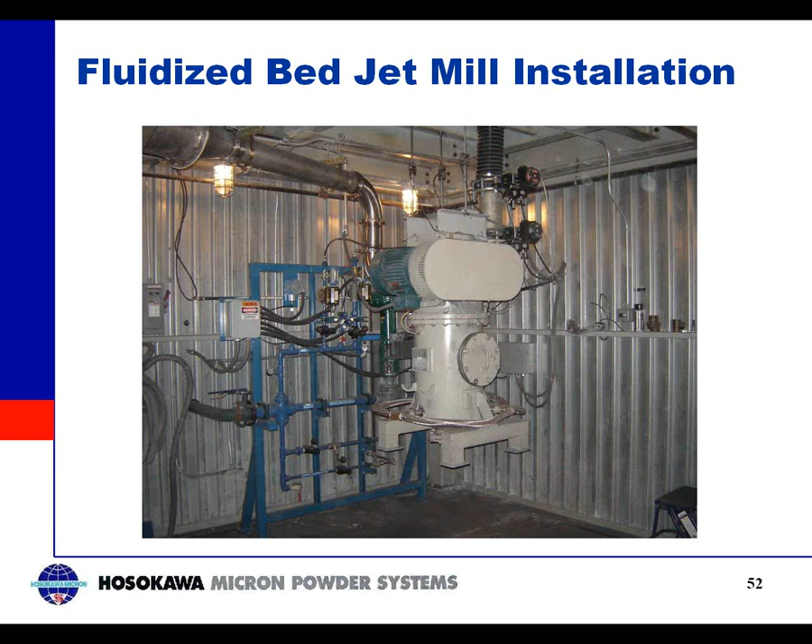Several types of ball mills and media mills can produce ultrafine grinds as well. In many cases, they are a more cost-effective solution for ultrafine grinding of large quantities of materials at high throughput rates. Their kilowatt-per-ton of material power consumption cost is usually much lower than that of a jet mill.